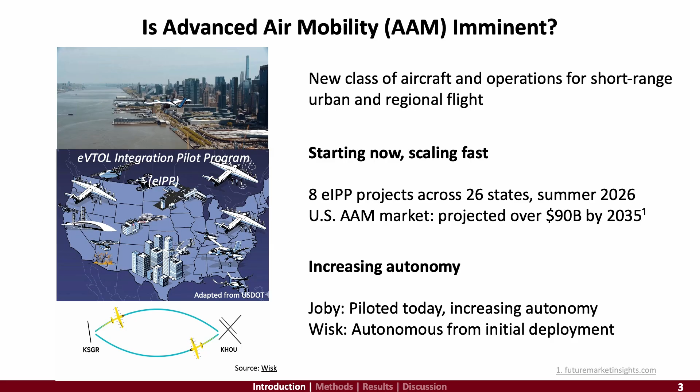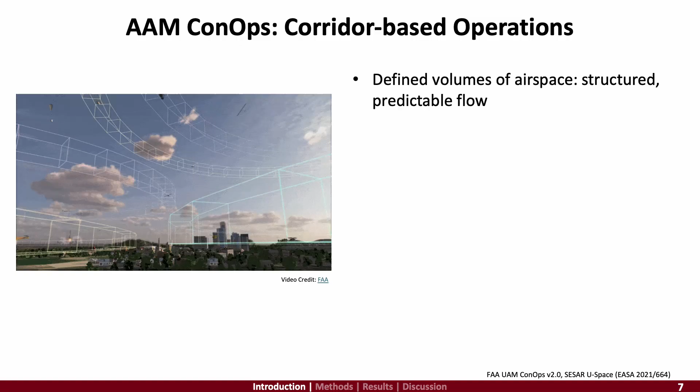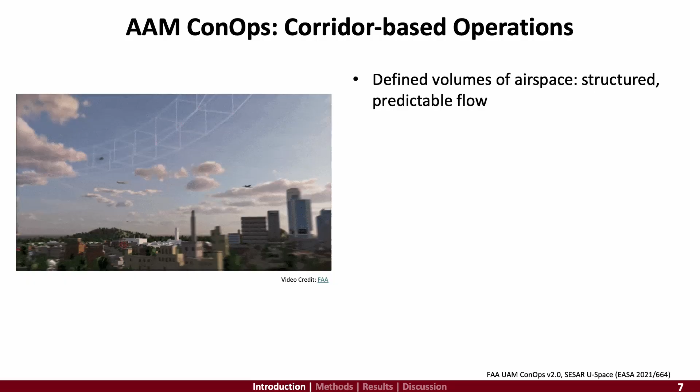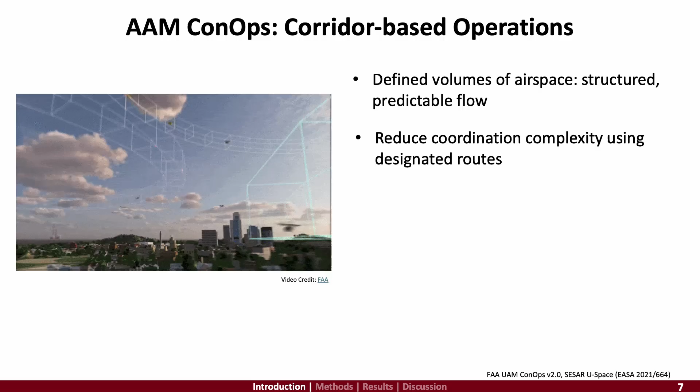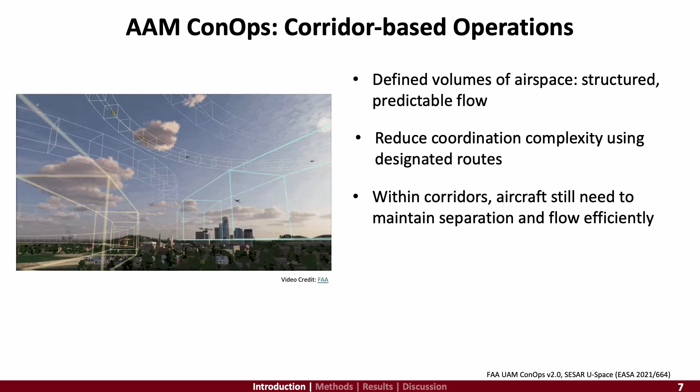Corridors are defined volumes of airspace with structured, predictable flow paths. We've been organizing high-density traffic with structured routes for decades through oceanic tracks and standard arrival and departure routes. Corridors apply the same principle to AAM. What corridors do is reduce coordination complexity. By constraining aircraft motion to designated routes, the geometric problem any coordination scheme has to solve becomes much simpler than free flight. But corridors don't eliminate coordination. Inside a corridor network, all aircraft still need to maintain separation and do all of this efficiently at AAM densities.

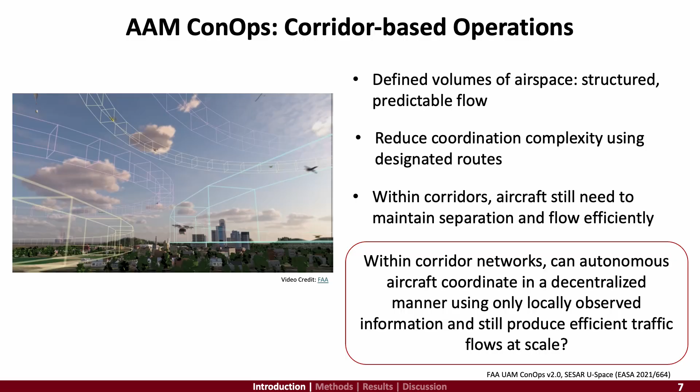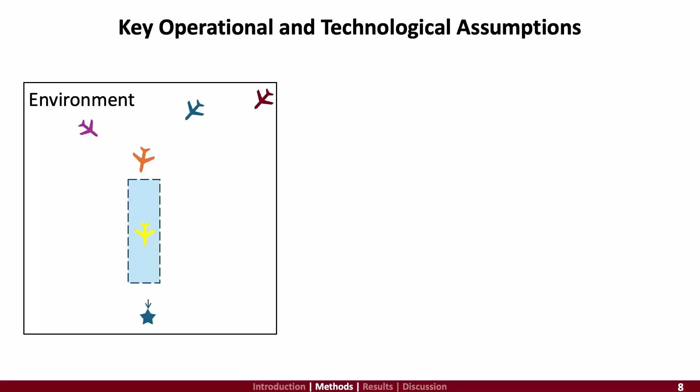So the question we ask is, within corridor networks, can autonomous aircraft coordinate in a decentralized manner using only locally observed information and still produce efficient corridor-conformant traffic flows at scale? The rest of the talk addresses this question. Before describing the approach, I want to outline the key operational and technological assumptions in this study. First is airspace structure. We assume corridors exist as a known static structural element. We're not designing the corridor networks, we're studying coordination within them. We also model all aircraft with planar fixed-wing kinematics.

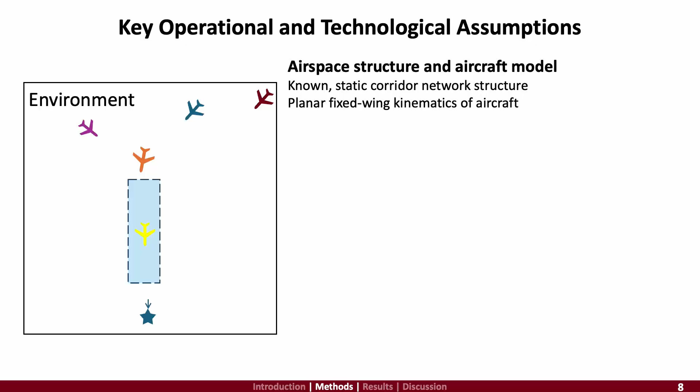Second, sensing and information sharing. Each aircraft observes its own state plus the relative states of nearby aircraft within a sensing neighborhood. The current or next corridor's relative position and orientation are available to aircraft. Notice that the aircraft's view of the airspace is limited to the current corridor. Third is communication. The observation model requires synchronous and accurate relative state observations. In practice, this cooperative broadcast could be through ADS-B or onboard sensing at an update rate compatible with the control loop. We don't model communication delays, dropouts, or uncertainty in the study. Characterizing how the policy degrades under those conditions is a prerequisite for deployment and is part of future work.

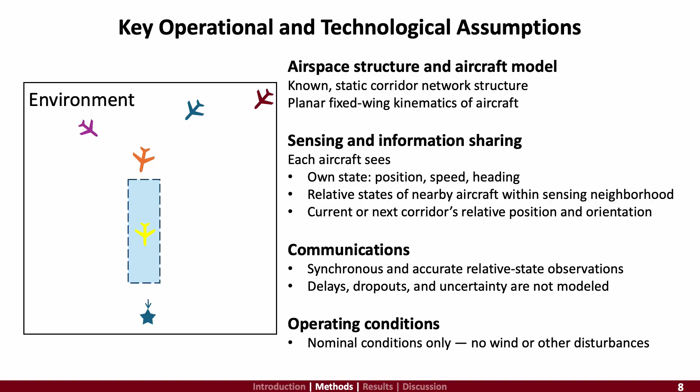Fourth, operating conditions. We train and evaluate under nominal conditions with no wind or disturbances. So with these assumptions in mind, here is the methodology. Our approach for decentralized coordination uses multi-agent reinforcement learning, or MARL, as a tool to study what coordination is achievable under a strongly decentralized operation. The methodology has 2 stages. In training, the system learns a policy by running many simulated episodes in a simple environment with 1 corridor, 5 aircraft, with all of them having the same speed range.

The geometry and starting positions are randomized every episode, and the 3 thumbnails on the left show some sample initial conditions. Every quantity in the observation, the position, speed, heading, is expressed in the aircraft's own heading frame. This means that a policy trained in a single corridor at a fixed orientation should, in principle, work identically in a corridor at any other orientation. This is the property that lets us train in 1 corridor and then deploy in networks of many corridors at varied orientations without retraining. What the aircraft does with those observations is command a turn rate and an acceleration within fixed wing performance limits, and that's the action space.

The policy converts observations into those 2 control commands, and training itself takes a few hours of GPU compute. The output is 1 policy. Every aircraft in evaluation uses the same one, and there is no per aircraft customization. Evaluation uses the same trained policy with no additional retraining. The training environment was a single corridor with 5 aircraft and a fixed maximum length. The evaluation environment scales all of those up to varied corridor networks, up to 40 simultaneous aircraft, longer corridors, and a network the policy has never seen. One thing worth noting about how this generalization is possible is that the policy never sees the global network structure. At any moment, each aircraft has access to its current corridor geometry or the next corridor's entry point, orientation, and exit.

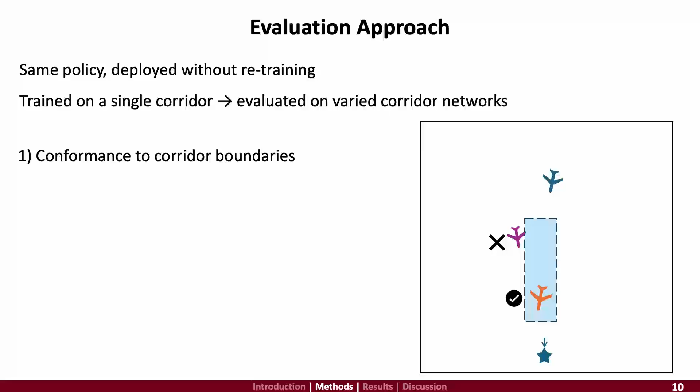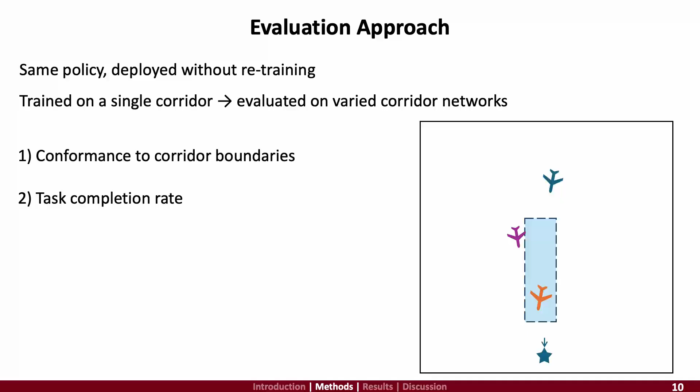Corridor boundary conformance, which is what fraction of the time aircraft stay within the corridor walls while traversing. Task completion rate, which is what fraction of aircraft reach their assigned exits before the episode ends. Third is average speed across each aircraft's traversal.

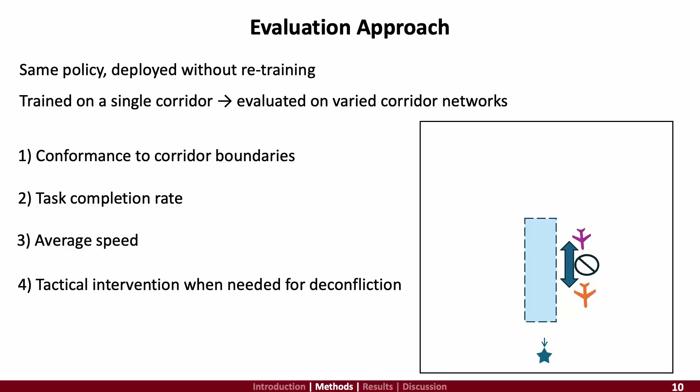And the fourth is the need for tactical intervention, which is the number of times an aircraft would require an external safety mechanism to maintain minimum separation. This one is the closest analog to a TCAS-style resolution advisory. The evaluation varies 3 things together: topology, density, and fleet composition. The next set of slides walk through each.

3 to 6 corridors is, of course, relatively simple. The real question is what happens when you scale up. Here's the network we built to test the policy at scale. We have 18 corridors in total, 3 entry points, 2 exit points, and 8 possible routes through the network.

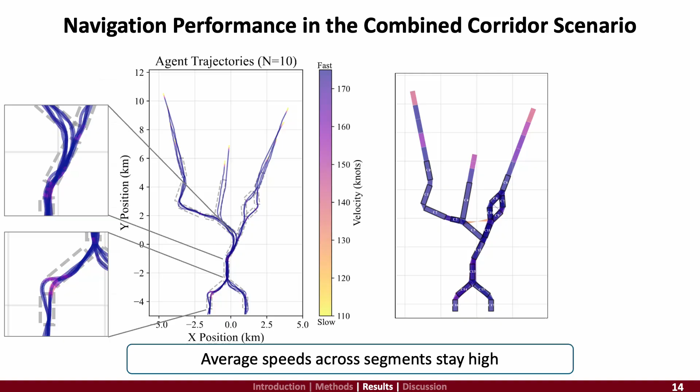Average speeds across the corridor segments stay high throughout the network, with only a modest speed reduction at the merge points. The speed reductions happen at 2 places, the merge junctions and just before the final corridor, which tends to be the most congested. As aircraft approach a merge point, the interaction density spikes, and the policy responds by slowing aircraft down to create spacing before they reach the merge.

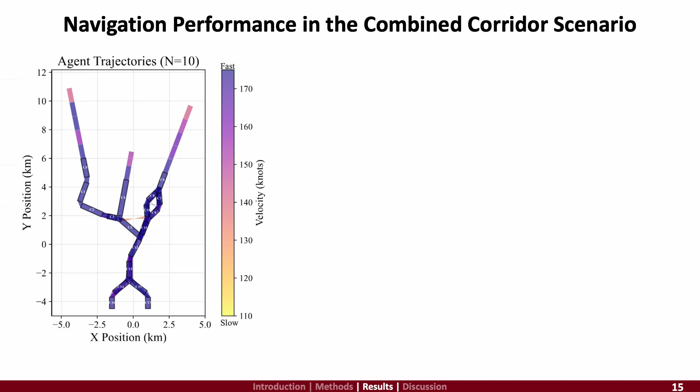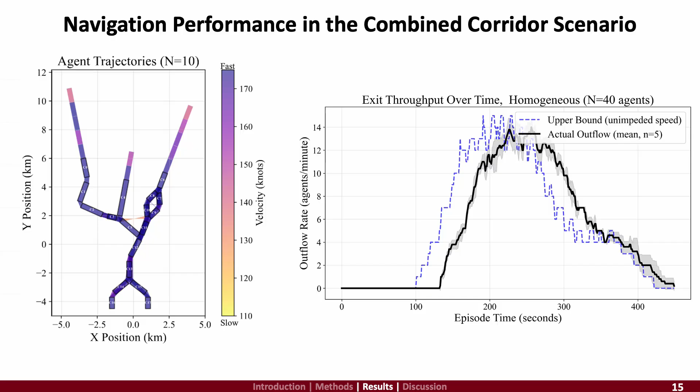We reach a maximum of 14 aircraft per minute against this upper bound of 15 aircraft per minute. With centralized coordination and more information, we could get a throughput that lies between these two upper bounds. Across all traffic levels, we still get high conformance and completion rates, and the tactical intervention stays below 5%.

Let's look at a heterogeneous fleet. Real AAM operations will not have identical aircraft. Different platforms will have different cruise speeds, so we tested how the policy behaves with mixed performance fleets. We took the same 18-corridor network and assigned 3 of the 10 aircraft a maximum speed of 140 knots, roughly 20% slower than the other 7, which retained their 175-knot maximum.

We have the same trained policy, no retraining, no change to the reward structure. We just run it. Watch what happens in the simulation at the inter-corridor gaps. The faster aircraft slow down behind the slower ones inside the corridors. They cannot safely pass without leaving the corridor. But the moment they reach an open gap between the corridors, they extend their path and overtake.

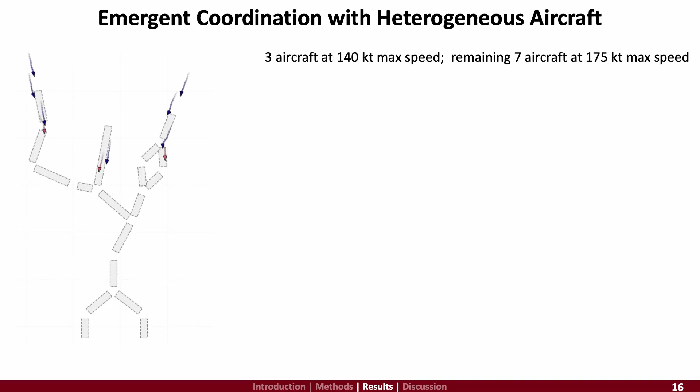We did not program this. There is no overtaking reward. The behavior emerged from 2 things the policy learned: stay in the lane and make forward progress. When these 2 objectives interact with a slower aircraft blocking the path, overtaking in the gaps becomes the natural solution.

Let's look at the trajectories. The black squares mark where the slower aircraft start. Look at what happens between the corridors. The faster aircraft extends its trajectory slightly outside the immediate corridor lane and overtakes the slower one. As soon as the next corridor's entry approaches, it re-enters the lane and resumes corridor conformance flight.

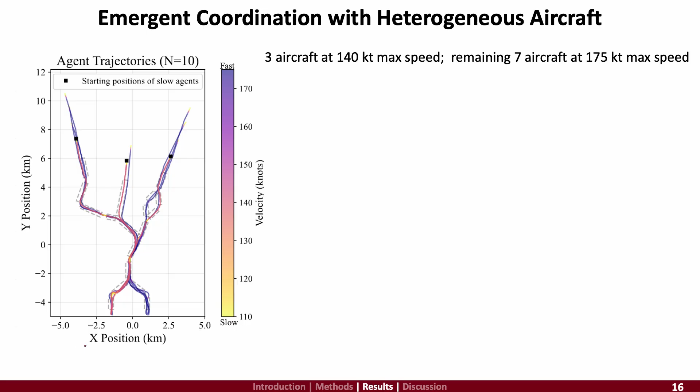The throughput plot shows the peak throughput of the policy dropping by a little as expected, and slower aircraft act as moving constraints in the high-density segments, and I'll show the comparison with the homogeneous case in the next slide.

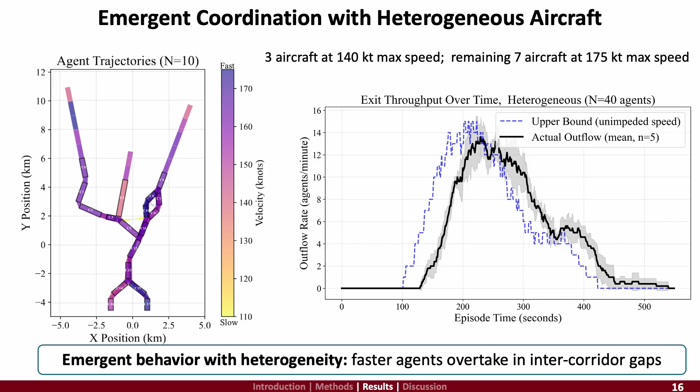To summarize, we presented a multi-agent reinforcement learning-based approach to decentralized traffic flow management for autonomous AAM operations in corridor networks. A single policy trained on one corridor with 5 aircraft deploys without retraining across progressively complex networks, up to 18 corridors and 40 aircraft, across heterogeneous fleets with mixed performance envelopes.

This work provides us a reference point. It tells us what is achievable when coordination is pushed to a strongly decentralized end of the design space, with aircraft acting only on locally observed states. The real AAM system's performance will lie somewhere between this extreme and that of centralized coordination. And knowing what's at each end of the design space and what it costs is what makes choosing intelligently between them possible. And that's the contribution this work tries to make.

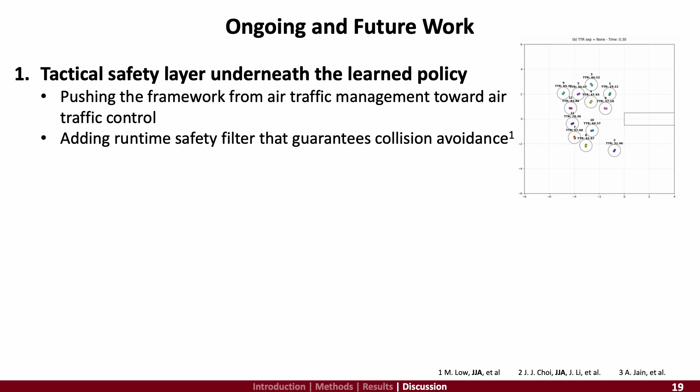Second, integrating hard safety constraints into the learning framework itself. Our prior work on layered safe MARL for merge scenarios in free flight settings without corridors showed how policies can learn to slow down earlier and make proactive decisions to manage congestion when paired with a safety filter during training.

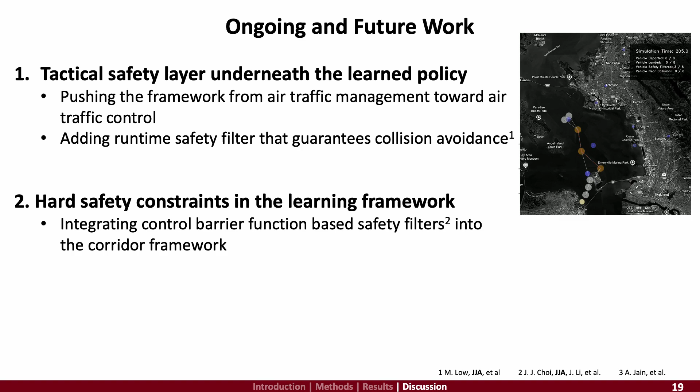And third, dynamic corridor networks. The corridors in this work are static. The network topology doesn't change during execution. But real airspace will have corridors opening and closing dynamically based on weather, demand, and traffic conditions. We haven't tested what our policy does when the topology changes at runtime.

So each of these threads addresses a specific limitation of the work I showed. Together, they trace the path from characterization of the decentralized end of the design space towards systems that could actually deploy.